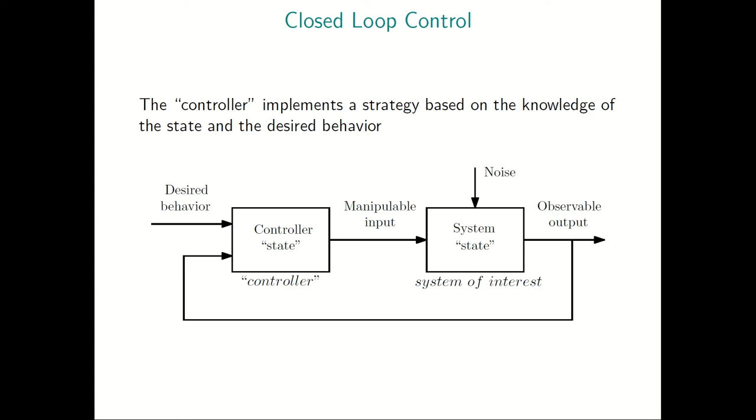The first example is the autopilot in an aircraft. Now maybe you're a little too young to get the reference that I have here. This is Otto Pilot in the comedic movie Airplane by Mel Brooks from 1980.

Otto Pilot in Airplane is an inflatable pilot that is capable of virtually nothing, but real autopilots in aircrafts are very sophisticated systems capable of combining, integrating, merging information coming from many sensors, and they're capable of sophisticated maneuvers, such as, for example, landing. So autopilots are definitely a kind of control system that I'd say everybody who has ever traveled on an airplane has relied upon. But we don't need to be on an airplane.

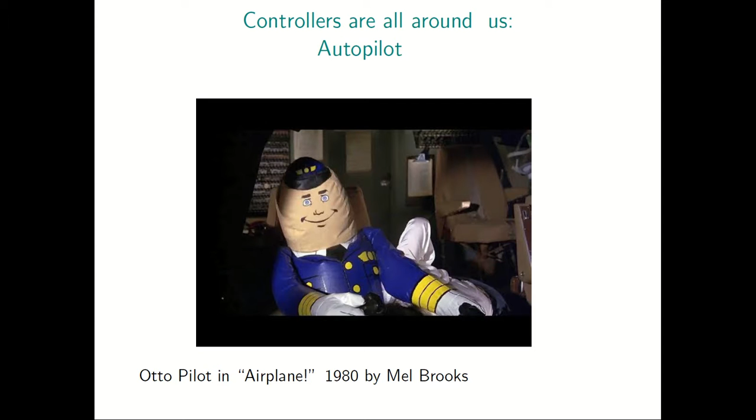If we are just in our cars, we start seeing a lot of controllers. For example, one is the cruise control. Cruise control allows you to keep a constant speed while you're traveling. I hope that the cruise control in your car is a little more sophisticated than the cruise control that is depicted in this picture. But a cruise control is nothing but a control system capable of keeping a constant speed that is your desired behavior.

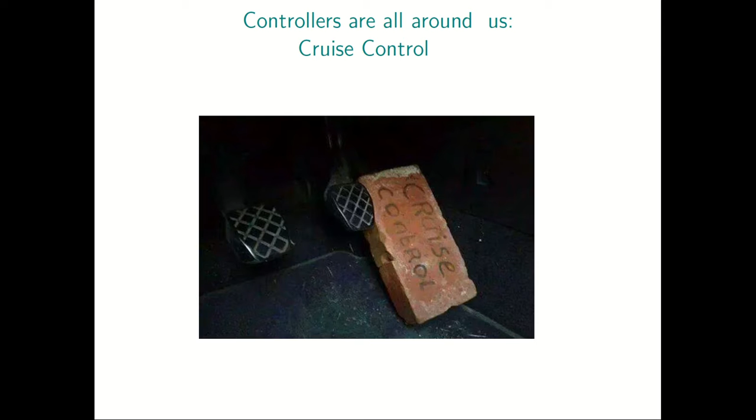Another control system that is definitely in your car, or I hope it is, is the ABS system, the anti-lock braking system. It's a control system that monitors the speed at which each one of your wheels is spinning, and it prevents each of the wheels in your car from locking. What happens when one of the wheels in your car locks? Well, the first consequence is that your braking is not so efficient. So if you prevent all the wheels from locking, your braking takes less time and you are safer.

But another reason why it's very important that your wheels don't lock is that if, for example, the wheels on the left side lock, then your car can start spinning, and that's definitely going to be very dangerous. So ABS is a very important safety system that is nothing but a controller.

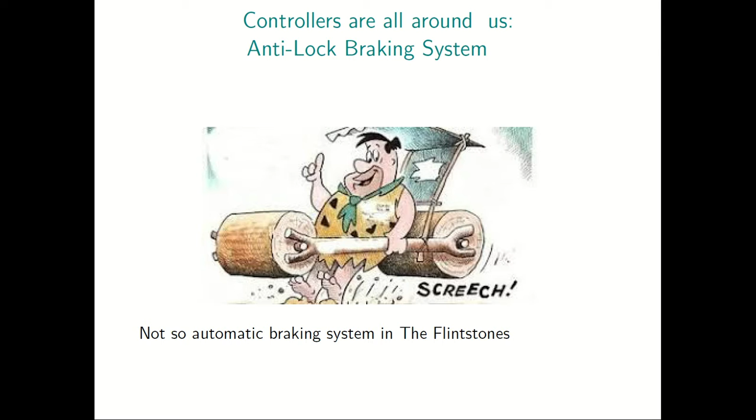Now, controllers are not only in vehicles; they're also in our houses, everywhere. And I'd say the most pervasive example is the thermostat. We have thermostats everywhere. Thermostats are not only controlling the temperature of our rooms. You definitely have a thermostat in your fridge, another thermostat in your freezer, a thermostat in your oven. You also have a thermostat in your computer to prevent your CPU, your microprocessor, from overheating. So thermostats are another simple control system that is capable of keeping the temperature constant.

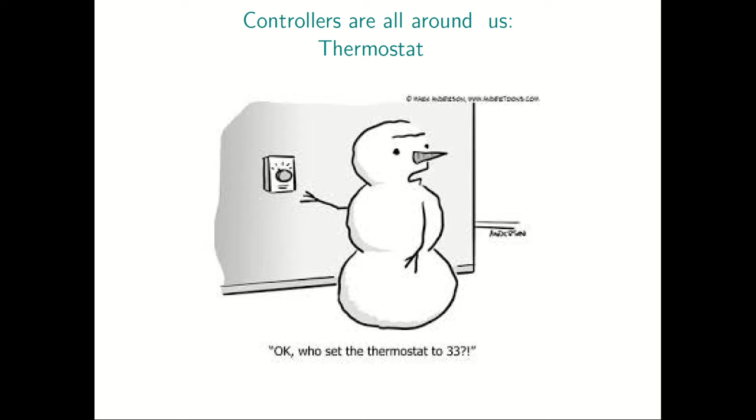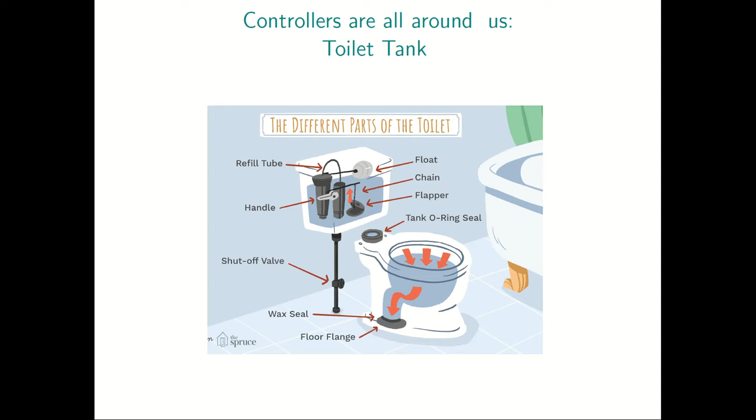Again, in your house, you might think that you are enjoying the maximum of your privacy, but even there, there is a marvel of modern technology that is working for you, and this is the toilet tank. What is the toilet tank if not a control system that is designed to keep the tank always at the right level, almost full without overflowing? So the toilet tank is again a mechanical control system. And if that's not enough, I want you to know that controllers are inside us too.

For example, the hormonal control system is just one of the control systems that are implemented in our body, and in this scheme showing how the thyroid gland is being controlled, we can see that there is a positive open loop from the hypothalamus to the thyroid gland, represented by these plus signs, and then there is a negative feedback that the thyroid hormones provide to both the hypothalamus and the pituitary gland to make this system stable, and we'll see what we mean by stable in this class.

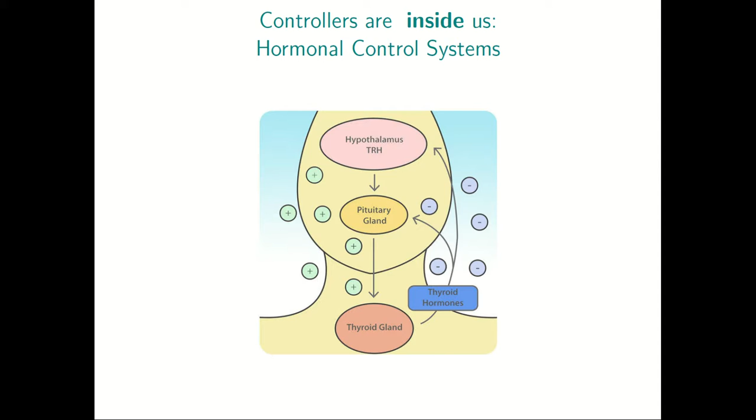Since we have seen that there are controllers virtually everywhere, but we haven't seen how they actually control, let me give you an example of a very ingenious mechanism that was used to control the speed of steam engines. James Watt, the inventor of the steam engine, adapted this controller, called the centrifugal governor, to control the speed of a steam engine. The principle is the following. Your steam engine is generating some torque, and the torque is used for something useful, but part of the torque is also sent to this controller.

So we have this system that is basically made of these two fly balls that start spinning at a speed that is proportional to the speed of the steam engine. When the speed increases, these fly balls tend to be farther away, and they move this arm that is connected to a valve. The further apart they are, the more this valve closes, so that less steam is applied to the cylinders of the engine.

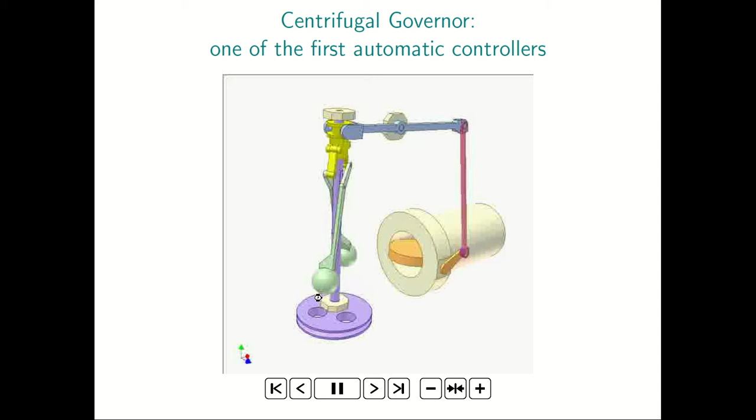So the faster the engine moves, the less steam is applied to the cylinders, making the engine slow down a bit. And if it's too slow, this valve tends to be open, and so more steam is given to the engine cylinders, so that the motor moves faster. So this is a very ingenious, purely mechanical way to control the speed of a steam engine to a desired set point.

So we have seen all these controllers, and in particular how the centrifugal governor works. This is a purely mechanical device. Nowadays we tend to implement controllers using electronics, because in this way we can scale their production better. They tend to be more reliable, there are fewer moving parts, and they can also be more sophisticated, because we can implement more sophisticated algorithms or policies using electronics.

But overall, we have seen what controllers do. They are always based on measuring somehow the output of the system, and they are designed to modify the input in such a way that the system of interest behaves according to our desires.